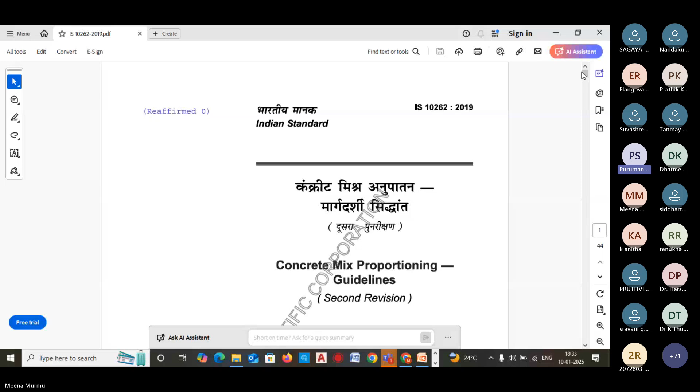Is it visible? Yes ma'am, okay. So in our IS... visible, no? Yes ma'am, slide is visible.

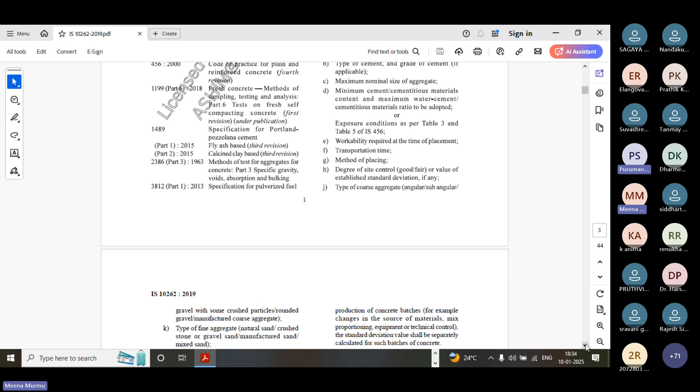So in our IS code 10262, 2019 version - earlier it was 1982, then 2009. In 1982 we have a graph, and here in 2019 also we have a graph showing cement strength, mortar strength from 1982, and water cement ratio. Now it has changed.

This is our graph of 28 days compressive strength of concrete versus water cement ratio. From here we calculate the water cement ratio. Whatever target strength we are taking, on the x-axis we have the water cement ratio, and according to that we'll finalize the water cement ratio.

There are three curves - curve 1, curve 2, curve 3 - for OPC 33, 43 and 53. Suppose nowadays we are also taking pozzolanic cement. That gives the expected 28 days compressive strength. This is about our OPC.

Suppose other than OPC, then we have to assume like this. In the absence of the actual 28 days compressive strength, curves 1, 2, 3 may be used for OPC 33, 43 and 53. So depending on the compressive strength of that cement, we have to take accordingly.

Maybe most of us, as faculty, already know how we design the concrete mix. So I will give an overview of all the mix designs, whatever appendix is given - normal strength, then adding pozzolanic materials in another appendix, then high strength concrete, self compacting concrete, mass concrete. So we'll touch all these mix designs.

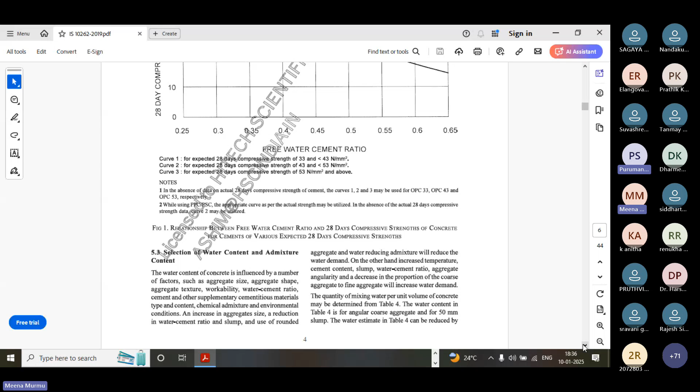So normally whenever we start the mix design, we calculate the target strength, and target strength is based on two formulas - that one also we all know.

FCK dash equals FCK plus 1.65 S, or FCK dash equals FCK plus X. So FCK is the characteristic strength, and FCK dash is your target strength, and S here is the standard deviation, and X is the factor based on the concrete as per the table given.

Standard deviation, from a statistical point of view, depends on how many samples we have taken - from that we calculate the standard deviation. And this 1.65 is a statistical value given in the 1982 code.

Why do we take only 1.65? As per the definition, characteristic strength means if we take 100 samples, 95% will pass, so 5% of results will fail. According to that, the 1.65 value came.

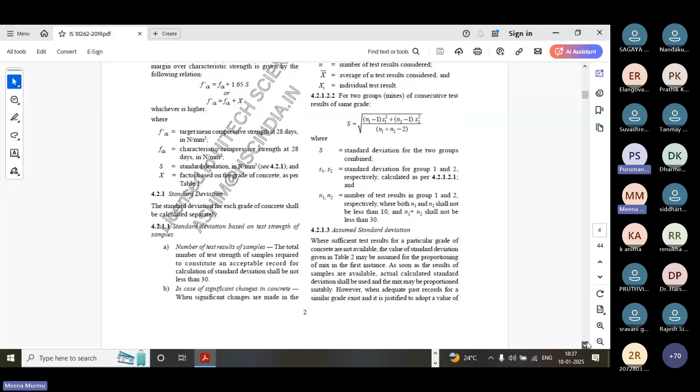After that, we finalize the target strength, and according to the target strength we finalize the water cement ratio.

Based on the size of aggregate, we assume and take the air content, and it is given in table 3. This is for normal concrete. Whenever you go for high strength concrete, the table is different.

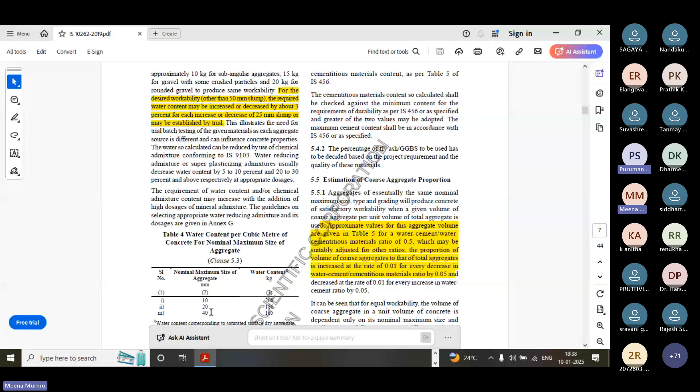Then after that, we choose how much water quantity is required. Normally for normal concrete, this is given for 50 mm slump. We refer to table 4, for 10, 20, 40 mm maximum size of aggregate. According to that, water content will be 165, 186, and 208 in reverse order - for 40 mm this, for 10 mm this, and for 20 mm this. This is taken for 50 mm slump.

Suppose the slump required is 100 mm, or 90 mm, or 70 mm - depending on that slump value requirement, we can change the water quantity. That yellow line may be visible to all of you.

So this table is for 50 mm slump. Other than 50 mm slump, we have to decrease or increase by 3% for every increase or decrease of 25 mm respectively. Suppose we take 25 mm slump, so we reduce 3% water. Suppose we take 75 mm slump, then we add 3% to 186.

So maybe all of us know this already - again, I am revising this one.

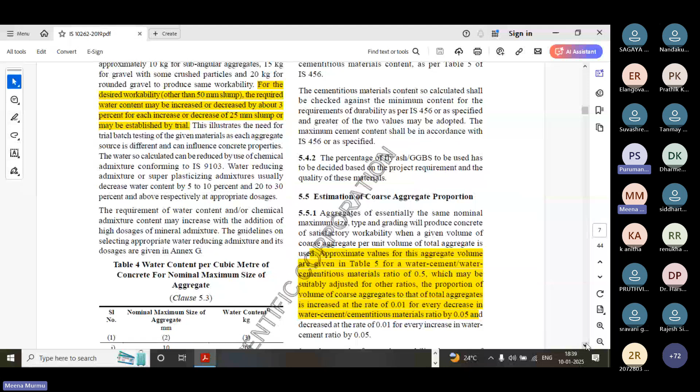Then it is given here how much percentage of GGBS and fly ash we are taking - that is also given. Another important point comes whenever we do the mix design.

This is the highlight color. One is given how much quantity of mineral admixture we are adding, and that day some participant has asked about that.

Plasticizer also - here it is given plasticizer, how much you will reduce. That one is also given in the code only, code itself.

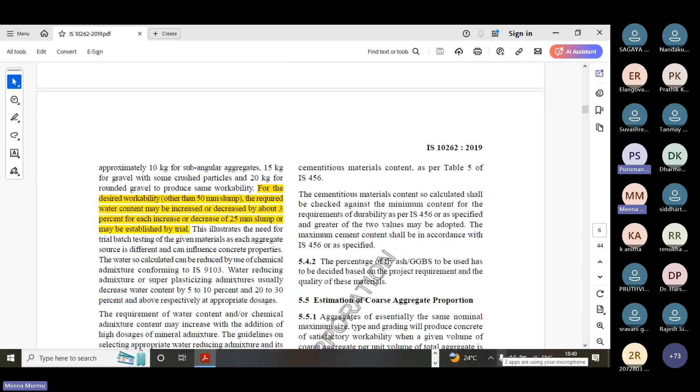Suppose you are using the high range water reducer, here it is given IS 9103, water reducing admixture or super plasticizing admixture usually decrease water content 5 to 10% and 20 to 30%. This is as per the code, but nowadays invention is going on higher, so the super plasticizer may reduce up to 40% also. As per trial and error, hit and trial, we can adjust the water quantity.

Next important one is estimation of coarse aggregate. For estimation of coarse aggregate, we have to refer table 5.

Here table volume of coarse aggregate - whenever we design the concrete mix, we have to design for 2 types: normal concrete, non-pumpable and pumpable. Pumpable means we transfer concrete through the pump, and non-pumpable means we transfer through chute. In non-pumpable concrete, normally we use aggregate 100%, but for pumpable concrete we have to reduce it by 10% and use 90% aggregate, in combination of fine aggregate and coarse aggregate.

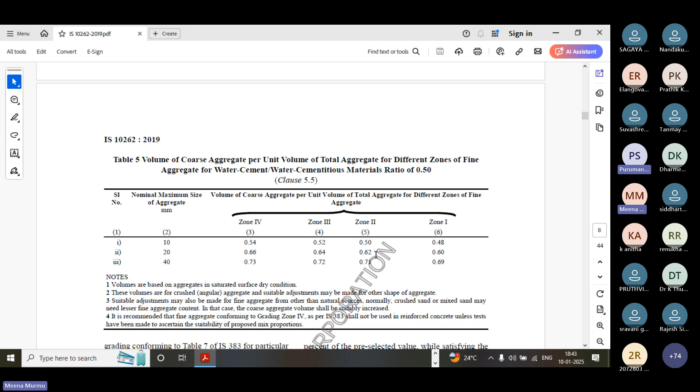Suppose, for example, you have taken 30 MPa characteristic strength, M30 grade of concrete you are preparing, then our target strength is coming to 38.25, and suppose here OPC 43 we are taking, so it is nearly 38.25.

So nearly it is coming in between 0.4 and 0.45, so we will take, suppose for example, 0.42. As per the table, it is coming to 0.5 water cement ratio. So for 0.42 water cement ratio, we have to recalculate the volume of coarse aggregate.

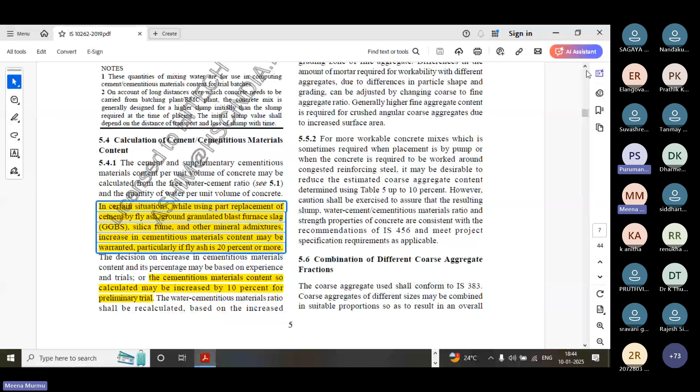Here it is mentioned volume of coarse aggregate per unit volume of total aggregate for different zone of fine aggregate, for water cementitious material ratio of 0.5. And now we have taken our water cement ratio as 0.42.

Another condition is also coming whenever we talk about the 0.42 water cement ratio, and this should be as per the previous IS 456, their table 5 is given.

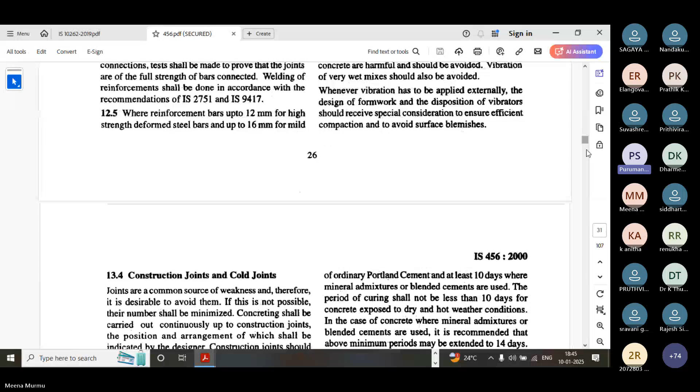So as per the curve we have taken that in between 0.4 to 0.45, whatever water cement ratio we have adopted, this is less than 0.45. According to 0.42, how much coarse aggregate we have to take, what is the volume of coarse aggregate we have to take - that we can choose from table 5, and we have to recalculate also. This is given in the code only.

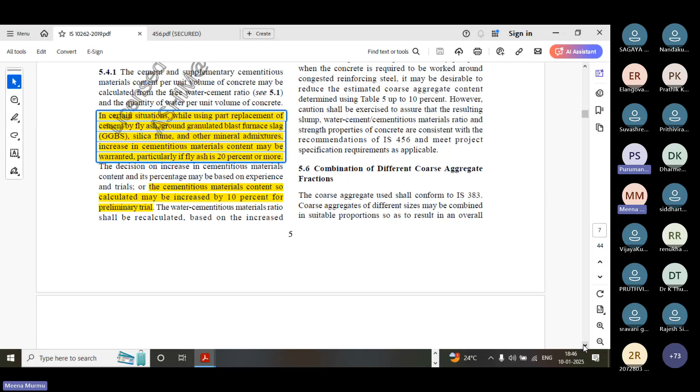In table 5, the approximate values for water cement or cementitious material ratio is given as 0.5, which may be suitably adjusted for other ratios. Suppose we have taken 0.42, so for every change the proportion of the volume of coarse aggregate of the total aggregate is increased at the rate of 0.01. For every decrease in water cement ratio of 0.05, it increases at the rate of 0.01, and for every increase in water cement ratio it is adjusted accordingly.

Now our water cement ratio is 0.42, so from 0.5 it is lesser by 0.08. For this 0.08, by interpolation, we can increase the volume of coarse aggregate from 0.62 as per zone two. So here approximately we can increase it by 0.02, giving 0.62 plus 0.02, which is 0.64 as our volume of coarse aggregate.

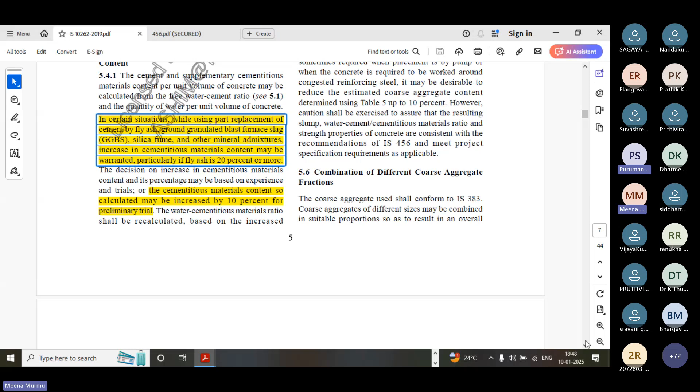The volume of concrete is 1 cubic meter, so we are preparing for 1 cubic meter. So 1 minus volume of cement, volume of water, volume of super plasticizer, and volume of entrapped air will give the volume of aggregate, which is constant. From this, we have calculated the volume of coarse aggregate and volume of fine aggregate. By multiplying the volume of coarse aggregate into the volume of aggregate into specific gravity into 1000, you will get the quantity of fine aggregate and coarse aggregate.

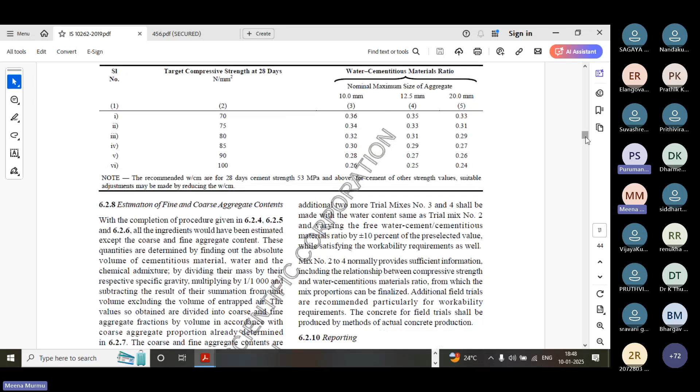Another important thing is coming. Suppose up to this it is clear? Hello, yes ma'am, clear, okay. So suppose yes, we are okay.

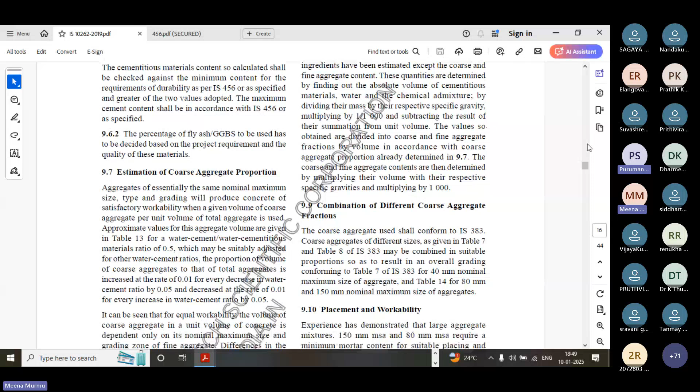So another point is water absorption and moisture content. In dry summer season, your coarse aggregate will absorb more water. Even on a normal day, some quantity of water will be absorbed. So we have to adjust that water quantity, and this adjustment is given by a formula here.

We have calculated this after the mix calculation. Suppose cement is this much, water is this much, fine aggregate this much, coarse aggregate is this much, chemical admixture and free water cement ratio are given. Suppose we are in dry condition.

Normally whenever we design the concrete mix, we take the aggregate for surface saturated dry condition. Surface saturated dry condition means we calculate the specific gravity by saturating the aggregate for 24 hours, then drying the sample for surface dry, then keeping the aggregate for oven dry, and after that we calculate the specific gravity. So whatever mix design we are doing, we are calculating it as per surface saturated dry only.

And field people use it in dry condition. So for dry condition, what is the weight of aggregate we have to calculate? Mass of fine aggregate in SSD condition divided by 1 plus water absorption divided by 100. So it will be 648 as per surface saturated dry, and as per dry condition it comes to 642.

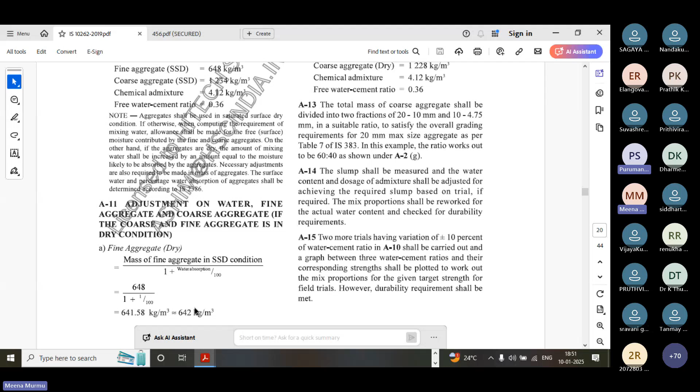So our weight of the quantity of aggregate is reducing. For coarse aggregate also we have to calculate both - this is the example where coarse aggregate also reduces. How much mass is reducing, that one you have to calculate. So for coarse aggregate it is 6 kg and fine aggregate also 6 kg reduction. So this is the quantity of water it is absorbing.

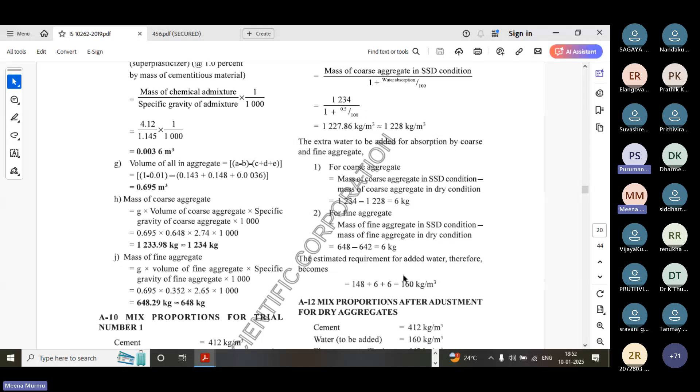So we have to add the 12 kg of water extra. Whenever there is water absorption in coarse aggregate, then we will readjust the water quantity. And suppose moisture is there. Is it clear now, up to this clear? Hello?

Yes ma'am, okay. Suppose moisture is there, then we have to calculate the fine aggregate in wet condition. What is the wet condition of the fine aggregate? Suppose moisture is there, so mass of fine aggregate in SSD condition into 1 plus free surface moisture divided by 100. So earlier it was 719, now it will be 748. So here your weight of the aggregate will be increasing.

And for coarse aggregate also same, so we have to readjust the water quantity here. Whatever water quantity you have got and whatever difference is coming, we have to reduce that. So whenever dry condition we are using, this is a simple thumb rule only: when water will be absorbed, we have to add more water, and when moisture is there, we have to reduce the water. So calculation will be like this. Okay, clear?

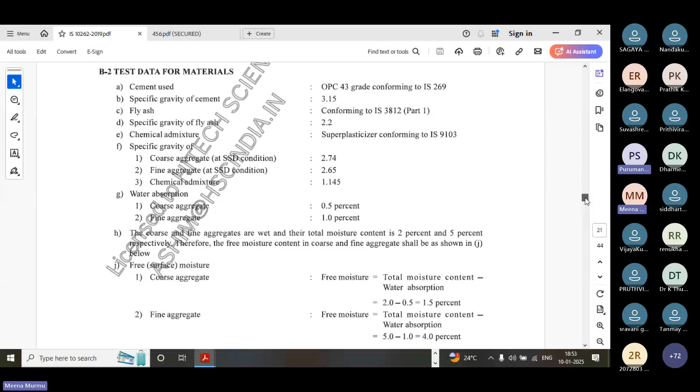Key points only I am explaining, because we'll join for another session also, and we'll discuss full IS 10262. That's why I'm going fast.

Another point is coming when we'll calculate the pumpable concrete. Suppose pumpable concrete we'll discuss, then for pumpable you have to take 90%. Here it is given: for pumpable concrete, we have to reduce 10% of the coarse aggregate. So this is for your normal concrete.

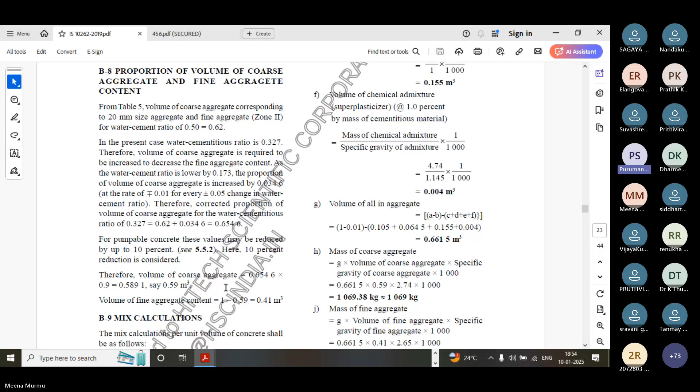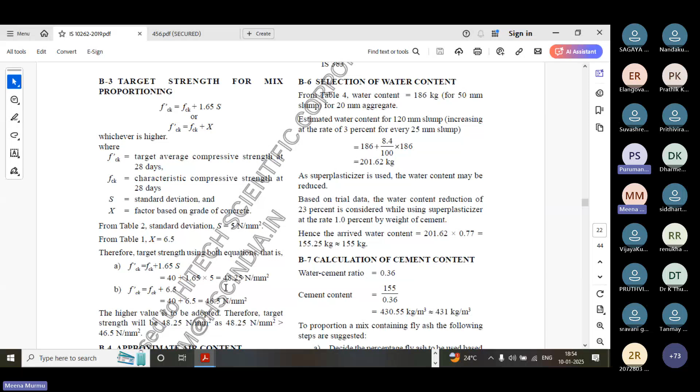And whenever you will add pozzolanic materials, suppose you are adding fly ash, then we have to calculate the cementitious material. And if you are adding GGBS, metakaolin, or silica fume, then we will consider it as 100% only. Suppose fly ash you are adding, then 10% cementitious material we are considering, so we have to calculate the cementitious content.

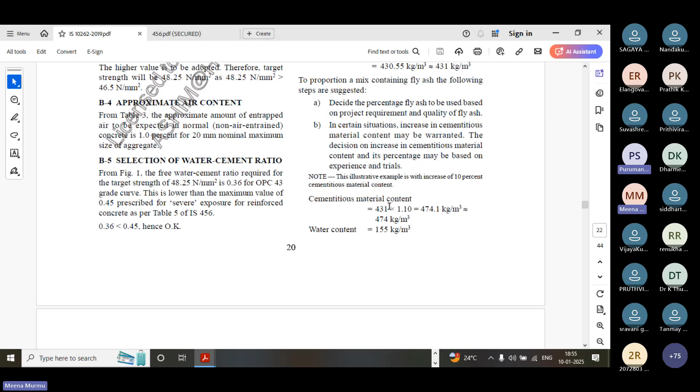Percentage-wise, cementitious material content equals whatever cement content you have calculated, and there you have to add 10% extra. So it is 474. And after that, how much are you adding the fly ash? Suppose fly ash you are adding 30% or 20%, according to that you have to divide.

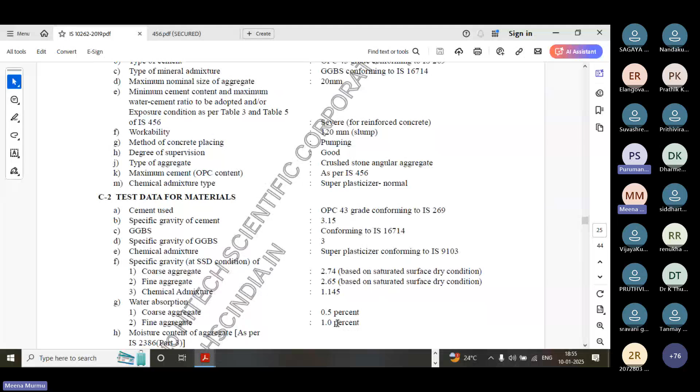Now for GGBS it is the same only, but here we are not calculating the cementitious material separately. We directly add, suppose 30% or 40%, in terms of cement we have to replace.

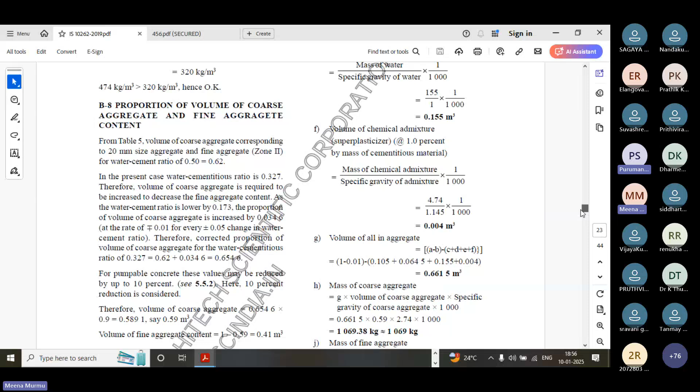So this is for your high strength concrete, how you will take the water cement ratio. For normal concrete we refer the table or curve, but for high strength concrete we have to use the target strength we are taking. For that we have to use this water cement ratio. It is started from 70 to 100, and depending on size of aggregate, coarse aggregate 10mm, 12.5, 20. Suppose you design for 100, some target strength around 90, then water cement ratio you have to take 0.24.

And another important point is for this we have to use the 53 grade of cement. OPC cement is better.

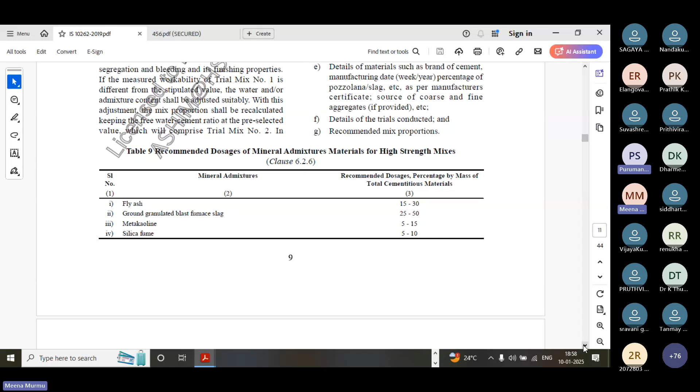And here we can minimize as per IS 456 also. If we are using OPC cement, then maximum cement content is 450 kg. So we have to use pozzolanic material, we will not achieve that quantity of cement otherwise. So for these cases, we have to add different types of pozzolanic materials, maybe fly ash, ground granulated blast furnace slag (GGBS), metakaolin, or silica fume, and this is given, how much ratio we can use, how much proportion.

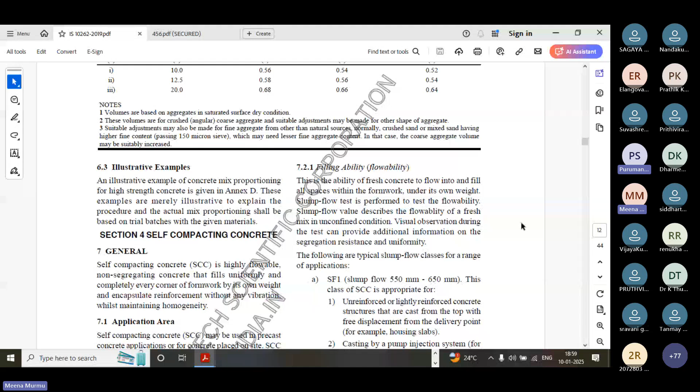Then here table is also there, we have to refer table 5 whenever we calculate the volume of coarse aggregate. Volume of coarse aggregate will be calculated based on the zone of the sand: zone 1, zone 2, zone 3, and zone 4 is too much finer. So for high strength concrete we are not using zone 4, and for water cement ratio 0.3 and same only for changing of water cement ratio we have to increase and decrease, rest are same. We have to calculate volume of coarse aggregate, volume of fine aggregate, and quantity of coarse aggregate and fine aggregate. Clear about high strength concrete?

Hello? Yes, ma'am. Yes, ma'am. Okay.

So next one is coming, our self-compacting concrete. That day sir has explained self-compacting concrete. So self-compacting concrete here...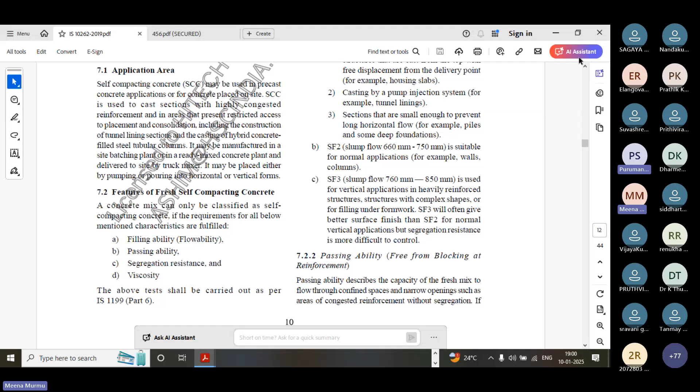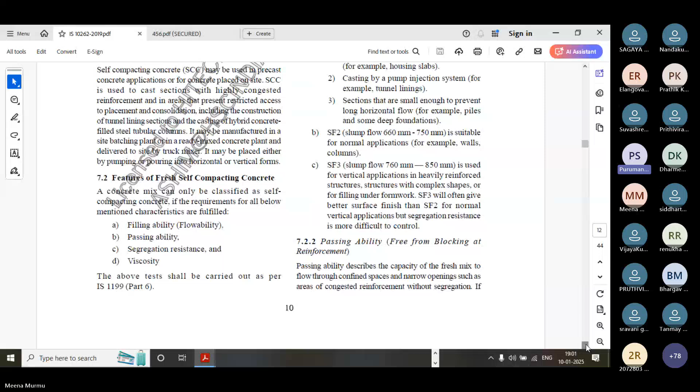What is the requirement of L box? L box normally relates to your horizontal height whenever we pour the concrete. So what is the horizontal height and vertical height? That ratio each should be 0.8 to 1.

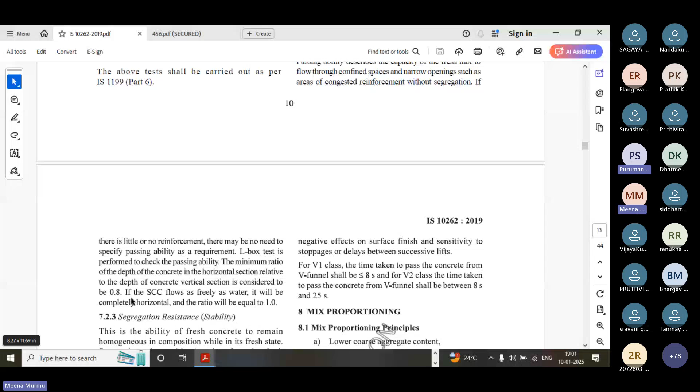Then next is your segregation resistance. Using the 4.75 sieve, we have to calculate how much percentage is passing and retained. Then next one is your V funnel, that has already been discussed.

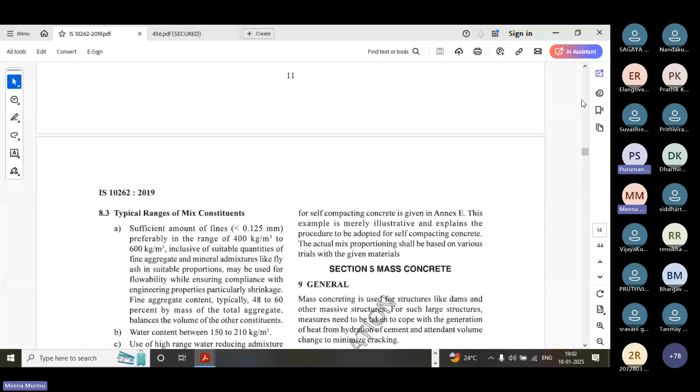Main thing is how we'll design it, that one we'll discuss. So here the design is a little bit different as per normal concrete and high strength concrete. It is fully different. There, as per the water cement ratio, we are calculating, but here first of all we have to assume the water quantity.

So for the trial, typical range of mix constituents is suggested: 400 kg per meter cube to 600 kg per meter cube we require for the fine content. Then water content between 150 to 210.

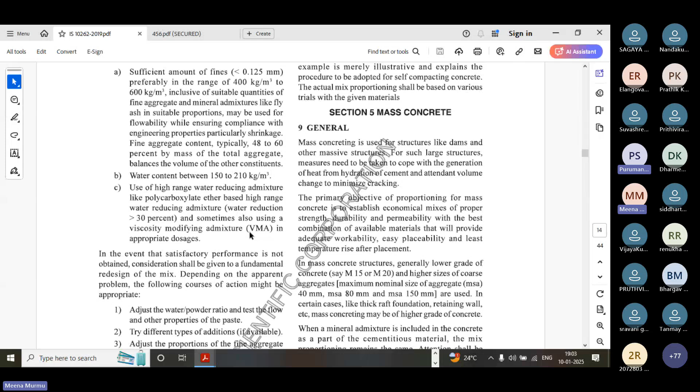Another is viscosity modifying admixture. We have to use high range water reducing admixture like polycarboxylate ether based high range water reducing admixture. And sometimes we also have to use VMA, which sir has already discussed. Suppose we are not using other finer particles like fly ash, then VMA is compulsory. If we use it, then it is good.

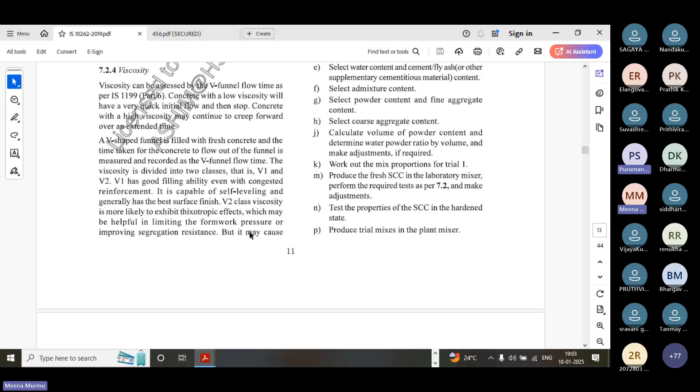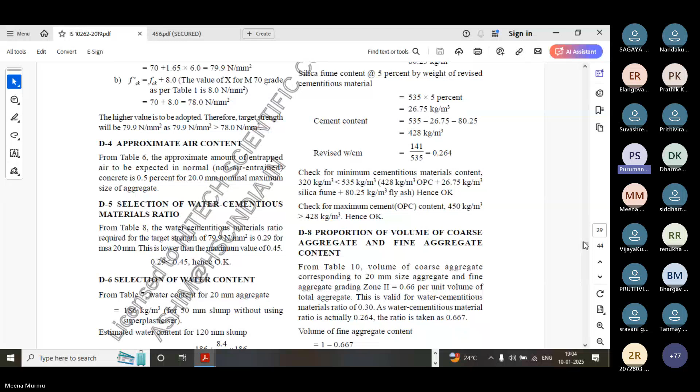So here the mix design will start from this, this is your M70 grade, whatever grade you are taking, it's not a problem.

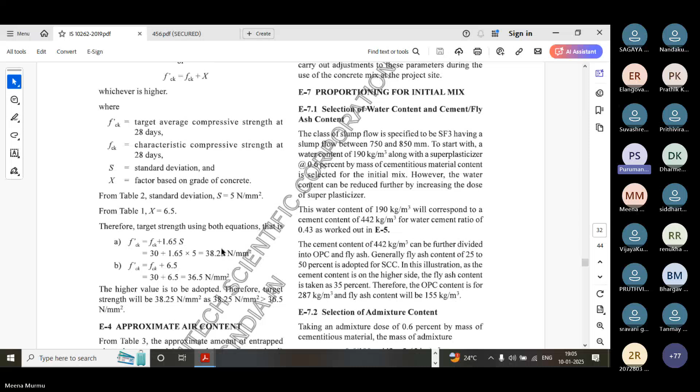As per that, M30 grade, this is your water cement ratio. But here you have to select that as per the slump flow, whatever range is given. Here it is mentioned for slump flow 750 to 850.

So there we have seen, how much we have seen, maybe up to 210. So it is in between that. So taking slump flow as the higher one, water will start from 190 kg.

There, as per the coarse aggregate, we assume the water quantity as workability. Here directly we will start as per the slump flow value, whether it is lower, higher, or medium. So for that we have started with 190 kg of water, and water cement ratio is our 0.43.

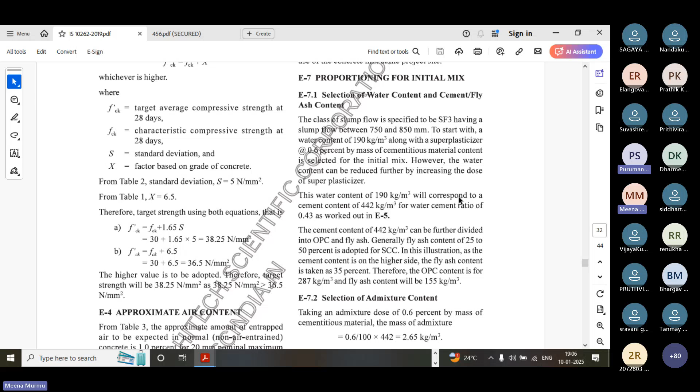Corresponding to this, the water content is 190 kg, corresponding to a cement content of 442 kg. And the content of 442 kg per meter cube can be further divided into OPC.

Generally fly ash content is 25 to 50 in our SCC, self-compacting concrete. But whenever you go for high strength concrete, if you are adding fly ash, then your strength will be reduced. Suppose you go for high strength, then we can add VMA with silica fume also. So here this is your fly ash and cement content.

Then selection of admixture is as per the cementitious material we can take. But the next thing is our powder content, which we have already discussed, 400 to 600 kg. And now here we have taken 442 as our powder content, the cement content.

So the powder content fine, less than 0.125 mm, required for SCC is generally in the range of 400 to 600 kg. And since SR class 1 and viscosity V1 is required, the mix shall be sufficiently cohesive having enough fines. Therefore, powder content equal to 520 kg per meter cube is selected.

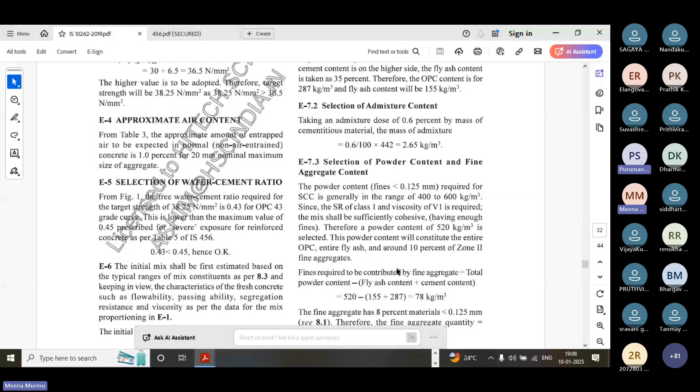For this, from where will we get our powder content? Powder content is 442. So 520 minus 442, we have to deduct. So this one is your 78 kg.

That 78 kg will be collected from the fine aggregate. So the fine aggregate has 8% material less than 0.125 mm, and therefore fine aggregate quantity is 78 divided by 0.08, equal to 975 kg per meter cube.

Did you understand this, or shall I explain? Is it okay? How is it, yes, coming? Okay, there, thank you.

Okay, so mixed design we can do like this. After that, simple calculation only. After that, this is the volume of coarse aggregate you have to calculate, and this calculation is same only. Any doubt up to this?

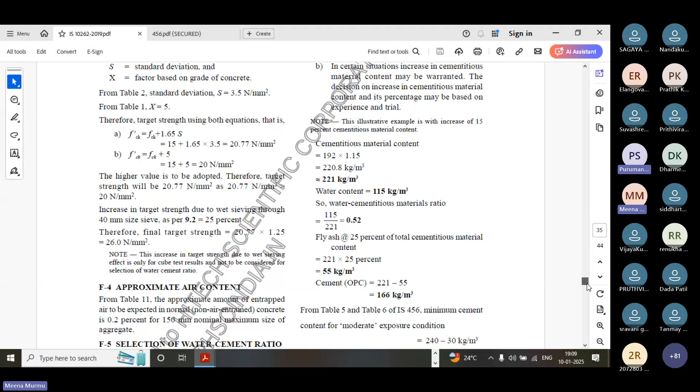Hello. Yes, sir, am I audible? Yeah, you are audible, sir. I am Dr. Dada Patil from Mumbai. I have one question in this table number 5 of IS 456 2000. Yes, sir, they specify minimum cement content as per that exposure condition.

Oh yeah, right, this one. So minimum, sir, whether it is minimum or maximum? Minimum here, minimum 300, 300, 320, 340, 360. Okay, this is there, okay.

Yeah, minimum cement content, yes. So that one is also we have to check. No, that one I have missed. Yeah, tell me. Listen to my question. So my query is whether it is cementitious content or cement, because I even did my PhD, I used more than minimum because grade was high. But minimum cement content, does it mean only cement, or does cementitious count, because some people say you can put 260 cement and add 40 on top to make it 300? So it is still not clear. What is your view? Because no one is able to clarify that doubt.

Excuse me, can I interfere here? Yeah, you can interfere. For table 5, it is always cementitious material, binder. It has been written in the footnote. If you enlarge the table, you will find it in the footnote itself: it is cement plus SCM, OPC plus SCM. That means, for example, severe 320 means I can put 280 cement plus 40 fly ash like that. Am I right?

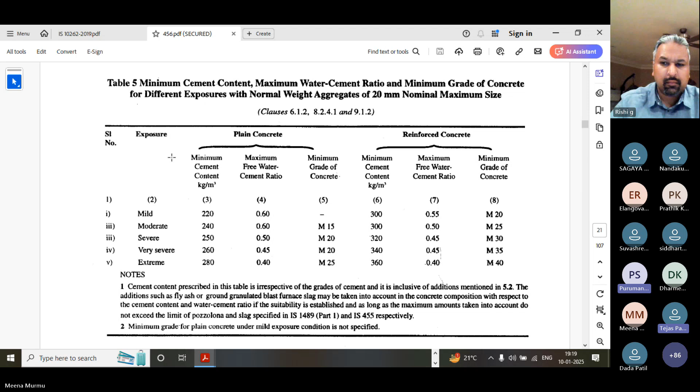People make some mistake that for M30 we need to have 320 kg of minimum cement content and 0.45 as maximum water cement ratio. That should not be the case. That is what I am into, no, say.

This table is especially for your exposure condition only. Whenever you will design, you have to check this. It has nothing to do with the strength and water cement ratio. It is explicitly dependent on your exposure condition, and that we need to know. Then only we need to follow this table.

If I don't know the exposure condition of the structure being considered, being constructed, then there is no point referring to this table. That we should already have access. Sorry for the interruption, sir, I am Ashok from Mumbai University working.

Sir, basically, while you are doing the design of the concrete mix, first you need to decide what exposure condition you are going for the concrete mix design. So based upon that only, you have to refer this particular table. That is the use of this table, because basically this table number 5 shows only the durability of the concrete structure.

That concrete structure is perfectly exposing. Okay, so it is perfectly right, actually. Yes sir, okay, thank you.

Whenever we do concrete mix, we do the mix design. There we should consider that the client has given the exposure condition also. As per the location also you can take the exposure condition. So we have to refer this table also for the checkpoint, for checking only. And that's why IS 10262 also mentions that water cement ratio should be lesser than this much only.

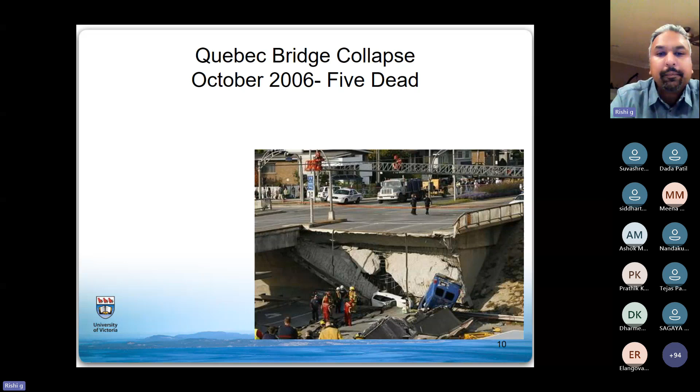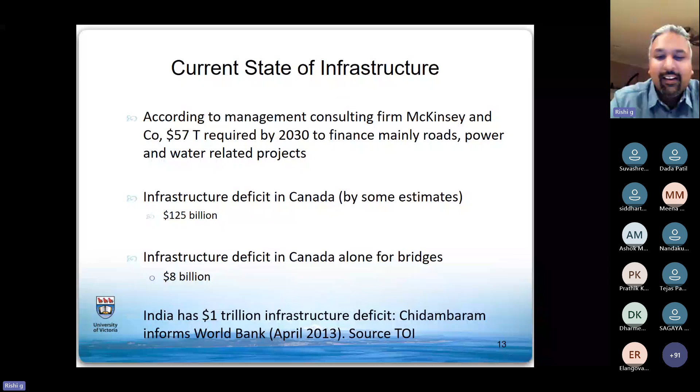Just to put some financial numbers here, these are very old, about 8-10 years old. But I can tell you that these numbers have only gotten worse because we are not investing as much in our infrastructure, and I talk about both Canada and India. I think there's a lot of infrastructure deficit that we need to fix. The last one here at the bottom is actually very interesting, because sometimes when we talk about all of the infrastructure, it becomes very difficult to relate to the issue, because in some of these numbers, when we talk about general infrastructure, everything is included: your water pipelines, your sewers, your airports, and all of that. But like I said, my favorite is the last one. If you look at the infrastructure deficit in Canada, just for bridges, fixing just bridges alone, the deficit about 10 years ago was $8 billion, and I know that number has only gone up since then. So a huge problem for us to fix. This again, like I said, is about 10 years old. In India, the then finance minister, Mr. Chidambaram, actually had put down a 1 trillion deficit for India in terms of fixing the infrastructure.

Now, just moving along, what is the solution? How do we fix these? We of course have to manage our infrastructure. And when I was thinking about this, I just thought about different aspects, and again, this is my interpretation, not coming from a textbook or anything. I think to manage our infrastructure and move forward, we need sustainable technologies. We need sustainable materials, we need sustainable composites. Composites are a big future, I think it's already here. Many of our structures, many of our systems are being designed with composites, whether cement-based composites or polymer-based composites. That is already here, owing to the many benefits that we have from composites.

We of course have lots of existing infrastructure. We cannot just bulldoze everything down. We have to think about how we can extract a safe life from the existing infrastructure, and for that, one of the key aspects is condition assessment. We need to know what's the condition of that infrastructure right now. I think sensors will play a very important role here moving forward, both for new construction and for existing structures. I think this is already happening, but at a very, very slow pace, both in Canada and in India. Life cycle assessment, I think, will play an important role, and finally, structural health monitoring, both for new and repaired structures, will be an important part.

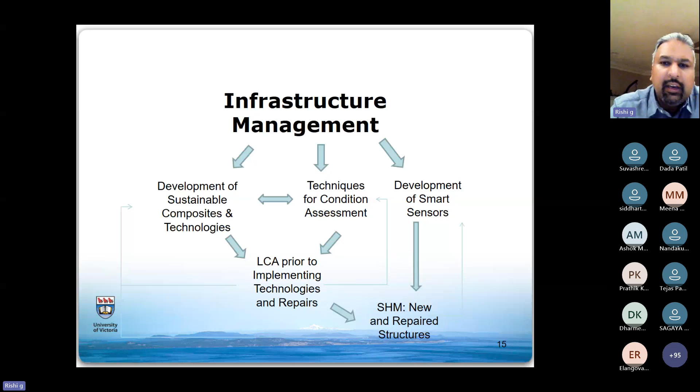So these are just some of my reflections on infrastructure management. This is what we focus on in our research lab at the University of Victoria.

Moving along, some sustainable construction technologies. Not just materials, but we have to think about the entire technology. What's the carbon footprint of how we construct these structures? How long are they going to last? We have to look at the full picture. Like I mentioned at the start, I'm going to talk about 3 case studies with you.

We'll begin with the first one. We'll talk about pervious concrete here. Maybe for pervious concrete, I'll start with the problem statement.

What you have here, you see the photograph at the bottom left. That's the photograph I took. I was in Vancouver, I used to live in Vancouver before, and I took a photo right from my house. I'm standing in front of my door and taking a photo at the street. You see my little garden there with some ice or snow in it, and you can't see it, but in my garden I have some tulips growing at the bottom. That reminds me that if I have tulips and a little bit of snow, this is probably about end of March or the month of April.

But the reason I put this photograph here is, of course, Vancouver gets a lot of rain - about 1,000 millimeters of rain every year. What you see in front of my house is we have the paved asphalt road, but there's a very broad shoulder here. And then the little stream of water that you see is actually the sidewalk, where people would be walking, biking, or using wheelchairs. But on this particular rain event, we have a pretty large amount of water flowing into the stormwater drain here.

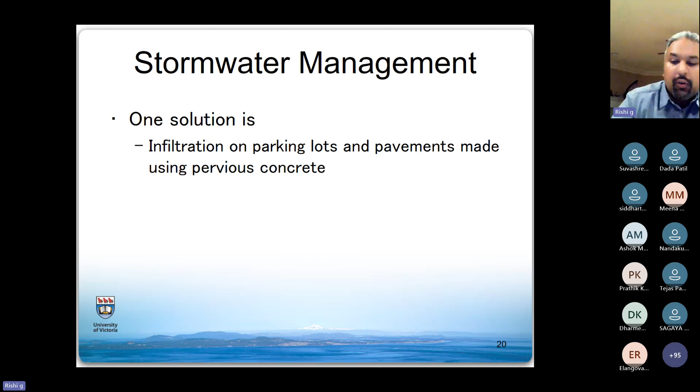So let's move forward. What we have here is pervious concrete. Very quickly, these are some of the samples we were investigating. Pervious concrete, also known as porous concrete sometimes, or no-fines concrete, of course has lots of voids. If you look in literature, pervious concrete can have anything from maybe 5% air voids all the way to 40-50% air voids. The systems you're looking at, the little briquettes in the image, were roughly in the 25 to 30% air voids range.

Now, just a side sustainability angle with pervious concrete - because I have 30-40% air voids, there's of course a sustainability angle. It becomes lightweight, that's a side advantage we have. And for the same volume of material, we have 30-40% less material because we have voids.

But why were we doing this? There's a lot of work that's been done on pervious concrete or porous concrete. The reason we were looking at this is, according to me, porous concrete is not a solution for every place. Porous concrete has to be thought about depending on the site. If the subgrade or the soil underneath does not have the capacity to percolate water, then there's no point having the media at the top which is porous. We have to think about site-specific conditions and decide on the percolation capacity of the media depending on what the ground can actually absorb.

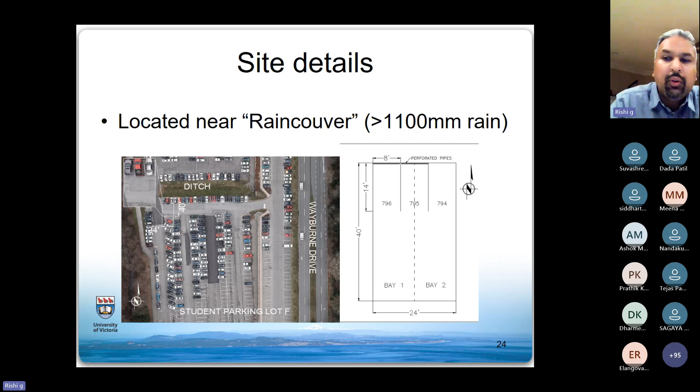Just some nice photographs here for you to appreciate. So what we ended up doing was we cut down 12 inches of the pavement. The asphalt was at the top, we cut down about 12 inches, and the subgrade was compacted with clear crush.

So this is simply gravel or aggregate, and that was the base of the concrete. Then the construction process began. I just want to show you something very interesting that was new to me when we were doing this project.

With porous concrete, you do not want to compact it too much. If you compact it too much, your voids will be reduced from what you designed for. If you compact it too little, your strength keeps going down, and the strength of porous concrete is already lower, as you may imagine. So you need the right balance of compaction.

What's happening here is very interesting. In the top photograph, this is a very large roller screed. It's actually like a pipe with ways to close the two ends. There are two handles, one held by this gentleman and another at the bottom, with a switch. The whole tube rotates while two people pull it across.

In addition, the tube can be filled with water, sand, or whatever, and sealed from the two sides to increase the weight. So you have vertical compaction just from the dead weight of the screed, but it's rolling, so you're doing compaction and finishing in one single operation.

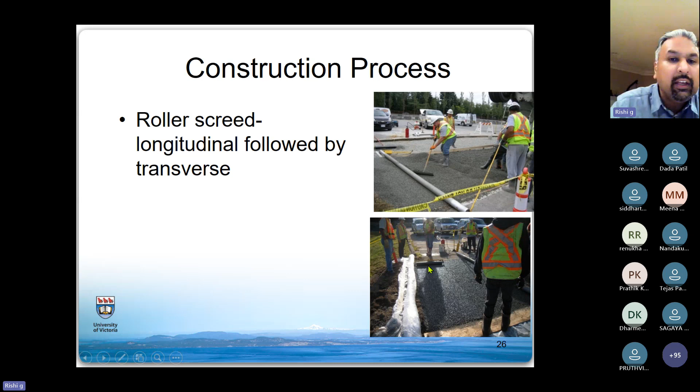This was very interesting, I'd never seen this before. What's happening here is a little manual screed at the bottom to get the fine finish you desire. A very interesting process, and actually very quick.

Curing took place as would be expected, and this is the finished placement. So we have 6 inches of gravel at the bottom and roughly 6 inches of concrete at the top. Very interesting to see that the porous concrete looks like compacted gravel, but of course the cement binder is there to hold it together.

This is finished, so I'm standing at that location looking up. One interesting part was coincidental, we didn't plan for this, the color of the porous concrete was actually very similar to that of the rest of the asphalt, so it did not stand out. Actually looked pretty good.

On porous concrete, some ongoing work, which was not a part of this project but was absolutely of interest to us, was the hydrological, environmental, and structural or material properties. I'll just give you a glimpse of what I'm talking about, I won't get into details, just keeping an eye on time.

In our porous concrete test patch, we had perforated pipes. These white pipes you see are perforated pipes, sitting just over the sub base, with the porous concrete coming on top. These are embedded inside.

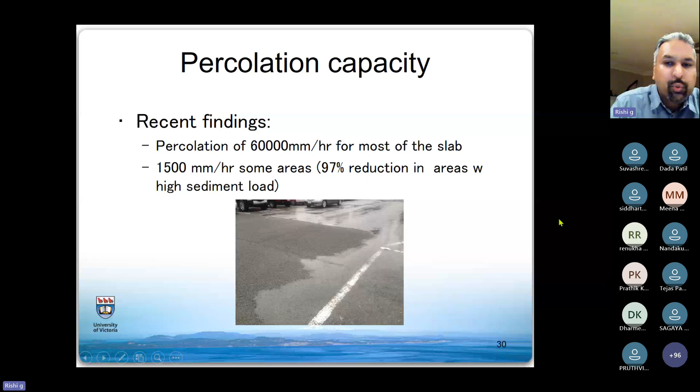So that was a very good visual that our technology here was indeed working.

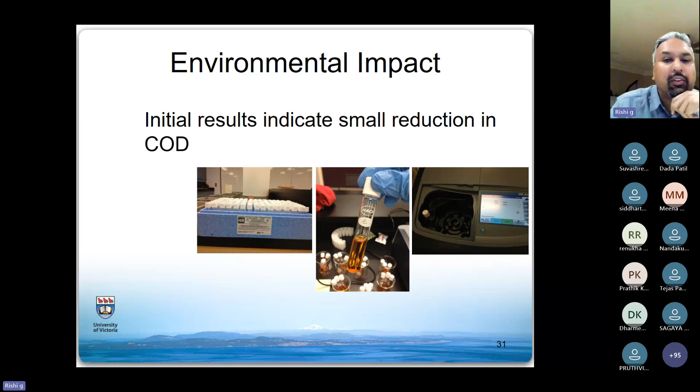For those on the environmental side, when I showed you this photograph on the left-hand side, it reminds me of a filter - like a classic sand filter where you pour water, and by the time it goes down, the contaminants are removed and the quality improves. That's what we were trying to do here: to see if the aggregates and the spaces between them actually have the capacity to reduce contaminants like biological oxygen demand, chemical oxygen demand, and so on.

Before I started, there was some discussion on concrete and durability. So just to put this out there, the cylinder we're holding looks very nice - looks like porous concrete. If somebody was doing regular concrete, they would say that's very bad concrete, with lots of voids and poor compaction. But in porous concrete that actually looks very nice - good distribution of aggregates. Our density had gone down from 2,300 to about 1,700 kilos per cubic meter.

Our strength was, of course, as expected, dramatically down - we were down maybe 3-4 MPa of concrete, but that's the reason why we had 6 inches of concrete. One potential research area here is that one of the reasons that contributed to the poor strength of concrete is there were no standards that prescribed how to make cylinders for porous concrete.

In India we do cubes - there is a standard procedure to make cubes, how to compact them. We have similar standards in the Canadian Standards Association and ASTM prescribing how to make cylinders. But how do you make cylinders for porous concrete? You cannot do tamping with a rod and so on. So I think part of the strength issue was that. If I had to guess, I think we were more like 10 MPa, which is what our industry partner had actually targeted in this case.

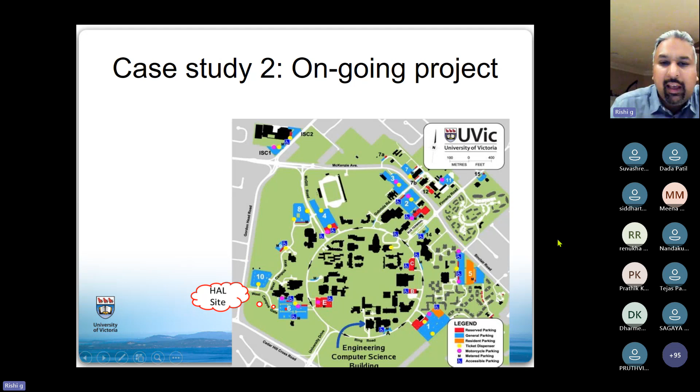So the second case study - this is again an ongoing project, shown here in a zoomed-in view. I'm going to take you from Vancouver or Richmond on the mainland to our island, to Victoria. This is our ring road, the University of Victoria Ring Road, and we have a test site on campus. I'll explain more about what's called the HAL site in a few minutes, but first I want to give a general introduction of LIDs.

I'm sure many of you have heard about low impact developments, or LIDs. There are different interventions for LIDs - we have green roofs, bioretention cells, rainwater gardens, swales, and of course permeable pavements, as mentioned. Generally what happens is there's stormwater runoff, we have a low impact development, and that's where we stop. What we were thinking is, what if we could come up with almost a treatment train in series, where we have a combination of not just one technique, but more than one technique? So how would that look?

This led to us starting about 10 years ago, I, along with my colleague Dr. Caterina Valeo, an idea of having two interventions in a row, and that's why we call it hybrid absorbable landscape. I'll show you examples of this in a minute. We're not relying on just one technology, but two technologies to perhaps improve the quality. Again, the focus here is on stormwater management.

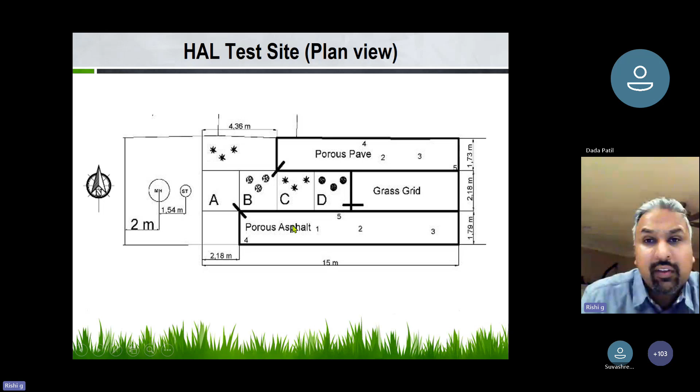Porous pave is a product made from about 50% gravel and 50% recycled tire waste combined together with a resin, and it has a lot of infiltration capacity. We also had porous asphalt, and eventually we even tried porous concrete on the side. Very popular in India are pavers, concrete blocks or concrete pavers. They also have infiltration capacity if you do not put a PCC course at the bottom. If you put a PCC course, of course it's not going to absorb anything through that layer.

So the idea here is to divert the stormwater, take it through front-end porous media, let it soak through, but don't stop at that. At the bottom, by having a membrane, we allow or force the water to go from the porous media into something else. What you see in the middle are bioretention cells, and in those cells my colleague Dr. Caterina focuses on what plant species or trees can do to remove contaminants.

So these are three different varieties of plants. We're looking at some native plant species which have very good uptake of water. When they take a lot of water, they also take a lot of contaminants, and they help clear or reduce the contaminants in stormwater. That's why this is called a hybrid absorbable landscape - we are using two interventions, porous media along with a bioretention cell, in tandem.

One question that does come up is, of course, if the stormwater is more and our media doesn't have the capacity to handle it, where will the overflow go? So this is not an isolated system - eventually, from the bioretention cell, the water would go back into the stormwater drains. But what we've done in between, with our intervention, is try to improve the quality, and also slow down the flow of stormwater. By this, we have retained the water, and that's actually very good for cutting down on peaks and lows of stormwater flow.

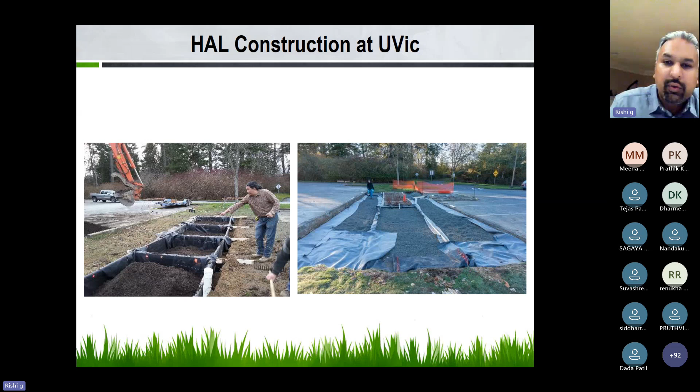So you just lay them, fill them with soil. So that was the other technology. This is porous asphalt that we laid down on the construction site.

And all of these are of interest, by the way, not just to the industry partners, but also to the municipalities, because at the end of the day, the municipalities are the ones who have to deal with all the stormwater coming to them.

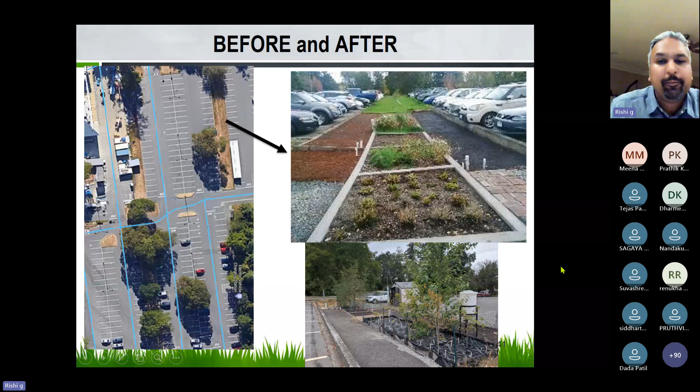So just some photographs of our team. I may not have time for this, but you see the little hut in the background. That hut actually has the data acquisition system for monitoring. All the white pipes sticking out have different sensors for water quality testing, and the hut stores all the data from these tests.

So again, these were some photographs about health monitoring. We have our own Met station here, because as you may have heard, the microclimate at a site can be very different from everywhere else, so we're trying to monitor that as well.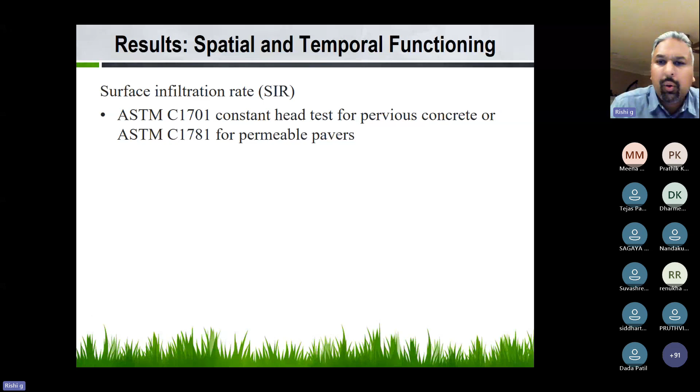Just some final remarks here: the hybrid absorbent landscape can actually be a very good potential. You can use any combination depending on your site, and I think it can be a very good way of managing our stormwater moving forward.

So two case studies done. I have the third one, and I have health monitoring if possible. So let's begin with our third one.

And this third one is, of course, on rammed earth, which is also known as cement stabilized soil. I do want to mention that there is a lot of work happening - this is a very, very hot topic. I know in India, and in the eastern parts, in fact the northeast parts of India, there is a lot of work happening on rammed earth as well.

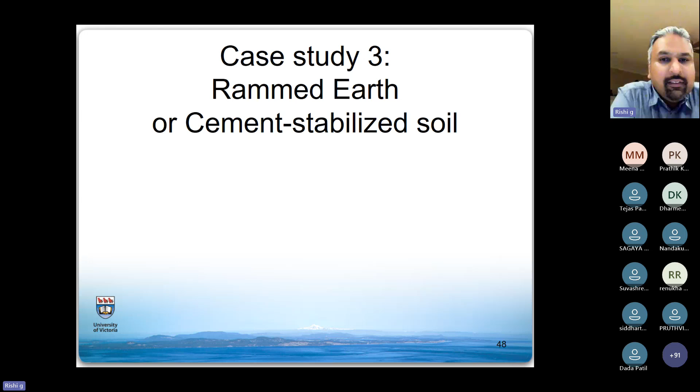And I will present the Canadian perspective on rammed earth, and showcase some of the work we have been doing here. So the motivation for rammed earth - I'm not sure how many of you have heard of this - there used to be a thing called the 100-mile diet, and this diet would say that if we truly wanted to be sustainable, we should be eating what's available within 100 miles.

I don't know if they meant a radius or a diameter, but let's call it a 100-mile radius. So anything you have within a 100-mile radius, that's what you consume if you truly want to be sustainable. So if I'm sitting here in Victoria in zero-degree temperature and I want to eat watermelons, there are no watermelons within a 100-mile radius of where I am, right? So the idea is that what I'm eating is coming from longer distances, and that's not sustainable.

So the same motivation goes for construction in general - use local, right? And again, I give examples from India because I learn a lot of things from India myself, where if bamboo is locally available, is there a possibility to use bamboo for construction? Or if I have desert sand available in western parts of India, can I use that for construction? So something which is local is the idea.

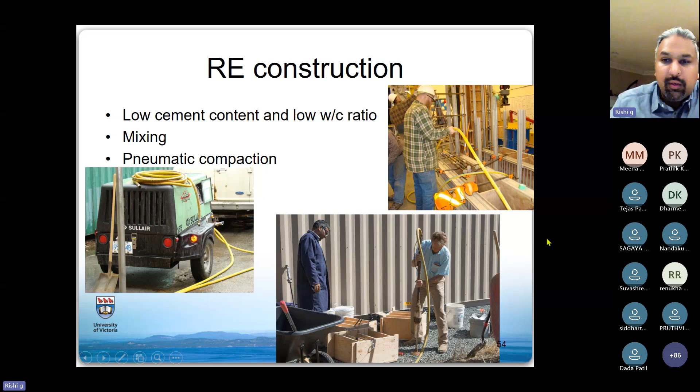Back to rammed earth - we had some research questions here that we were trying to answer. Formwork pressure, for example. Some of you in design of formwork know that with traditional concrete, self-consolidating concrete is one of the major design issues because the pressure is very, very high. The same question was for rammed earth.

Now I'm consolidating vertically using a pneumatic rammer, but what's the pressure on the forms? If it's a dry mix, is it zero? But if I continue to compact, what would be the lateral pressure on the formwork? That was the question being asked, so we're trying to install some lateral pressure sensors here to find that out.

The two photographs in the middle here were sort of the big design questions. The structural designer wanted to find out if stirrups or loops in the column, versus diagonal, would perform better in terms of the performance of a rammed earth wall. With rammed earth we are thinking about vertical wall construction.

This is a nice photograph - it shows you the insulation in the center, and rammed earth would be on the two sides. Here's the rammed earth with the stirrup and insulation. Both types of shear reinforcement have their own issues because you have to cut through the insulation to go across. Our structural designer partner was very interested in finding a solution.

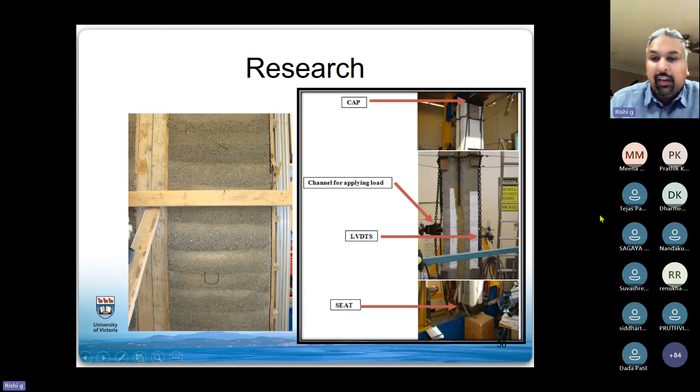We will move forward. Remember the two design questions: diagonal shear versus stirrups. At the end of the day, the performance for the structural designer was that the inclined stirrup wall performed way, way better than just having the stirrups in there. And that's what the designer took for future design considerations.

So a very interesting project. We continue to do a lot of rammed earth construction. If you are interested, please just look up rammed earth in British Columbia, and you'll actually see lots of beautiful structures being constructed.

So we'll move on to, before health monitoring, my last case study. This is a PVC stay-in-place concrete forming system. In India, I think insulated construction is catching up. In Canada, it's been here for a very long time. For those who have interest in insulation, you may have heard about it, or you can search it.

It's called ICF, insulated concrete forms. The idea with ICF is you have insulation on the two sides, and you basically place concrete in the middle. The two insulation pieces of the formwork, you just leave them in place. So that's called insulated concrete.

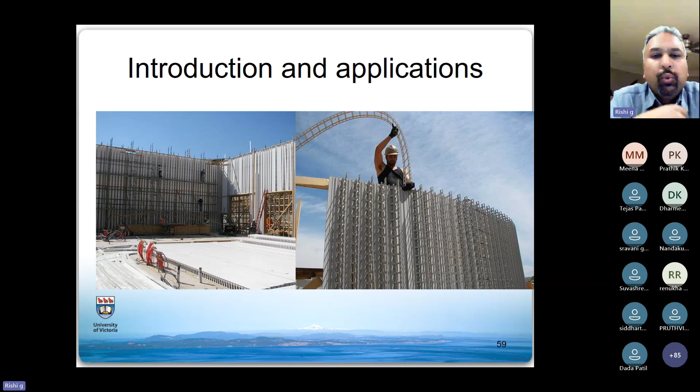What the company was looking to do was to study the effect of the PVC in addition to just being a forming system. Does it actually do anything else other than that? This is the top view. There are different configurations of panels and connectors that the company has, and they were interested in seeing what's the contribution of each one of these to the structural strength.

Again, this is a top-down view. We are looking down at the hollow of a wall. Here we are in our lab. What we're doing is we brought a ready-mix truck, it's backed in, and what you can see here is three different heights of columns.

So we have short columns, medium columns, and some tall columns. If we wanted to see the effect of buckling taking place, and here is compaction taking place with a needle vibrator. The crew from the company is doing that.

And then we were testing our columns again in pure axial load. So this would be one piece of the wall, right? One cell of the wall, this would continue, but of course testing a wall can be a little bit difficult, so we were looking at one little cell at a time.

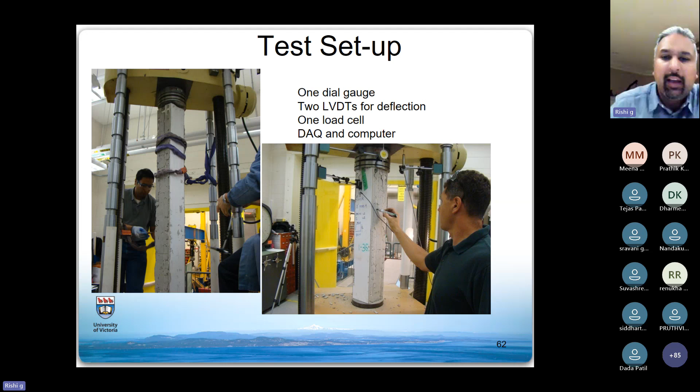Of course, the first thing that comes to mind is confinement - confinement will help you increase the compressive strength. But remember, this is not a very high modulus material, we're talking about PVC. So there were a lot of different ideas. I'll throw out one other: because it's nicely encased, the curing of the concrete is much better because the moisture is contained inside the PVC.

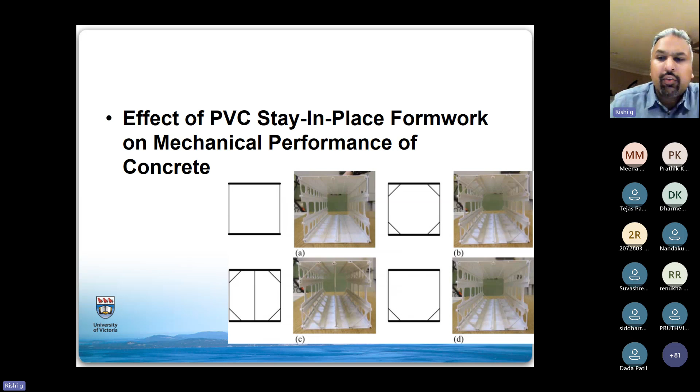So what is the effect of the PVC forming system on the mechanical properties of concrete? Of course we always like to start with compression, so we did that, but in addition, what was different now was we made beams out of it. We have traditional reinforcement in it, but in addition, what we have at the bottom would be the PVC layer.

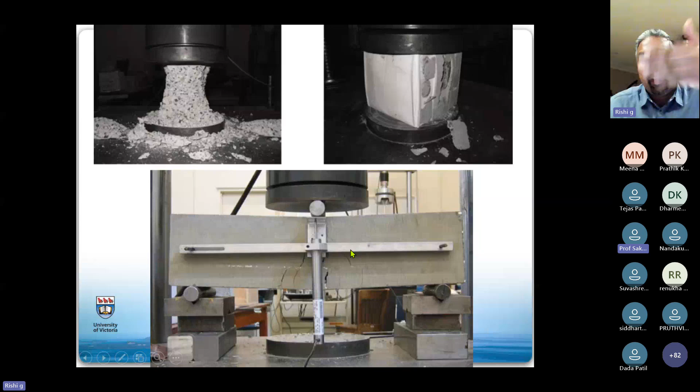This beam, you can't actually see the panel, but the panel would be at the bottom. And what would be on the face that you see right now, that would actually be the connector - the hollow connector. And looking at the flexural capacity of it.

I won't get into too much detail here, but the tested beams still contained the PVC. We, of course, did our standard Whitney block and all of those calculations to quantify it. Like I said, this is published work, happy to share it with you.

I know it's getting late in the evening for all of you, so I don't want to bore you with too much heavy material here. So we'll keep moving forward to the last part I added for today's presentation, which was structural health monitoring and non-destructive testing.

Before I get into it, I just want to mention that we can come up with new technologies and breakthroughs, but our clients, our industry, and our codes and standards will eventually ask us to show evidence that your new technology is doing what it's doing. In my opinion, health monitoring and non-destructive testing are ways to show evidence that the new technology we've created as engineers actually does its job.

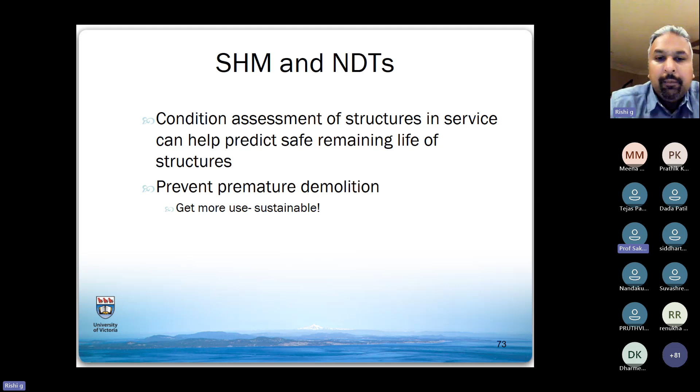What we're trying to do here is use embedded sensors. These days, embedding sensors in concrete seems like a routine thing, but if you can imagine about 15 or 16 years ago, this was relatively new. So what we did here is we had two pavements.

We have control concrete and a fiber reinforced concrete pavement, which had cellulose fibers in it, and we wanted to compare the performance of the two pavements. Of course, we could do non-destructive testing, but in this situation we were actually interested in the early age behavior - what happens within the first 3 or 5 days. So we had embedded sensors. That's one example I wanted to show you.

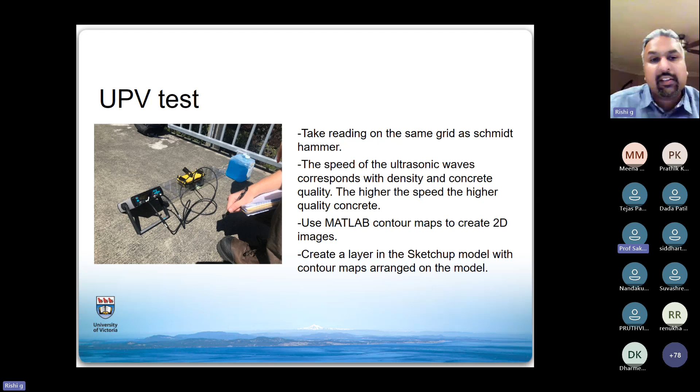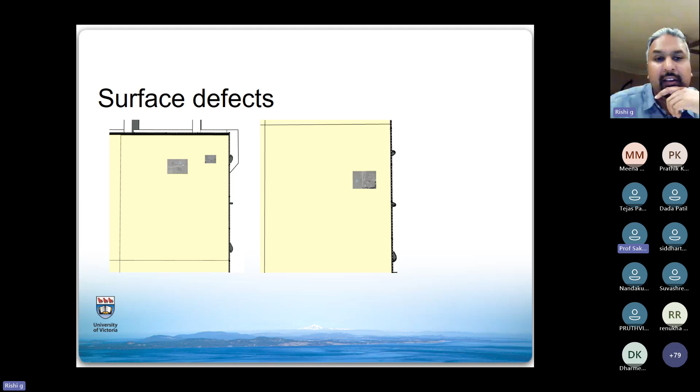We use ground penetrating radar here, to try to identify what was not visible to the naked eye.

We actually got a glimpse of the reservoir from the inside. Every 2 years, the reservoir is completely emptied and gets a thorough cleanup on the inside. So we were able to time it to get a very good view from the inside, so we could corroborate what we were seeing from outside with what we were seeing from inside. This is a very extensive structure that we don't have an appreciation of when we are outside. When we go inside, it's a very deep structure.

So in addition to some of the base NDTs that we did, we were able to identify certain zones where the municipality should keep a close eye on. But like I mentioned before, the municipality was very interested in what would happen if an earthquake took place. We know the condition before the earthquake, but how do we know what has happened after?

So the second phase of this project was to have some real-time structural health monitoring for them. So a very big suite of sensors - sorry about the little mess on the text there, but we have everything here, I can spell it out for you - from accelerometers to tilt gauges, to of course strain gauges and deflection gauges, and even crack gauges, for example.

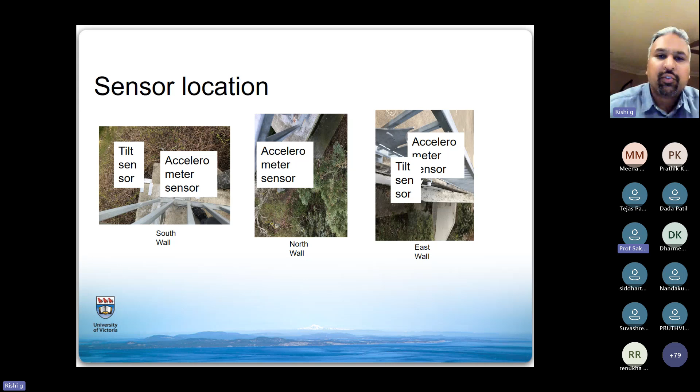So we did all of that, and again, I won't spend too much time on this. My student Nazrin has been doing much of this. Data visualization is taking place. Finally, some of the takeaways from this particular project are...

NDTs were able to be used to confirm that the structure is in reasonable condition. We are actually in the process, as we speak, to construct a digital twin for the structure, so we can monitor what happens in real time.

I'll just throw in my own little comment here on health monitoring. I'm typically not that excited by the magnitude of the numbers that I get from the sensors. What's usually of interest to me is what is the change of those over a period of time.

So if I have two wall panels in the water reservoir with a gap of 13 millimeters, great. 13 millimeters means nothing to me right now. The reservoir is good, it's not leaking. But if an earthquake happened and the 13 millimeter remained 13, I'm still happy. If it became 25, I would be concerned about that. So I'm always looking for the change in the readings. Even for accelerometers, what's important to me is the change of the signature over a period of time.